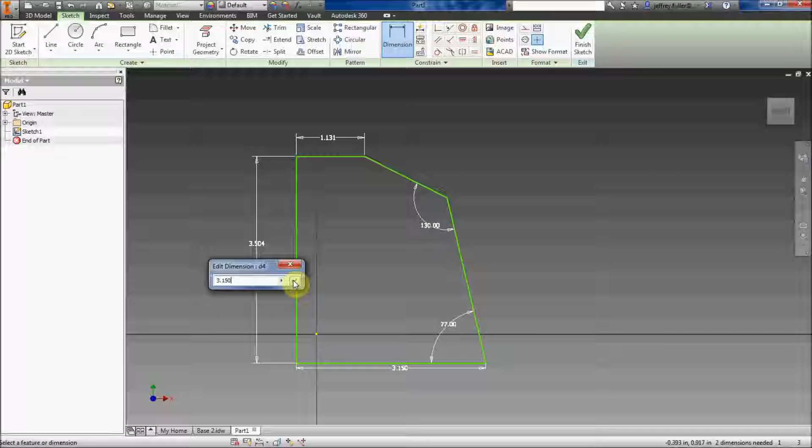Okay, everything else is still the same. Still got 77 degrees here, 130 degrees here, and we can double check this, 3.150 there.

Now I need to mirror what I've just created, and I'm going to use this command right here, called the mirror command. I'm going to click on it, and what it's asking me to do is select the geometry that I want to mirror. So I'll select this line, this line, this line, and this line. I'm not going to select this line, because that's going to be my mirror line.

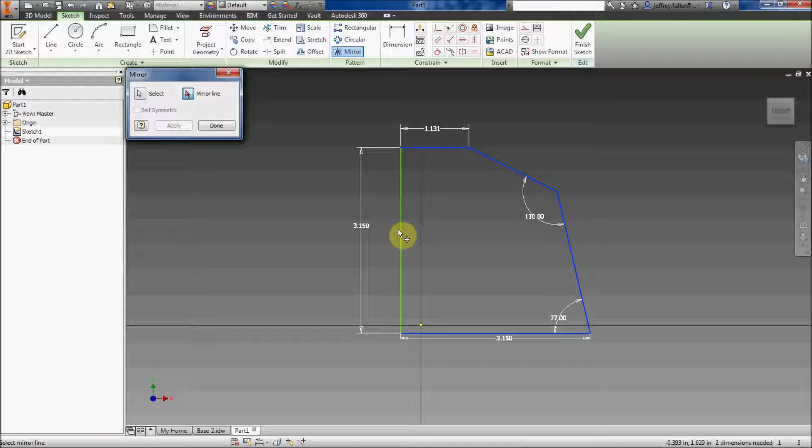So I go back to my dialog box here and click on the mirror line selection, and select that center line. Then I click apply, and now as you see I have my whole sketch of my entire base. Click done, and then of course we can click finish sketch.

Now we're going to extrude. I'm going to go back to my drawing and see how far I need to extrude it. So we're looking at this from the side. We'll go over here to this view, and we see that it is 4.724 inches wide. So 4.724 is how far I want to extrude it.

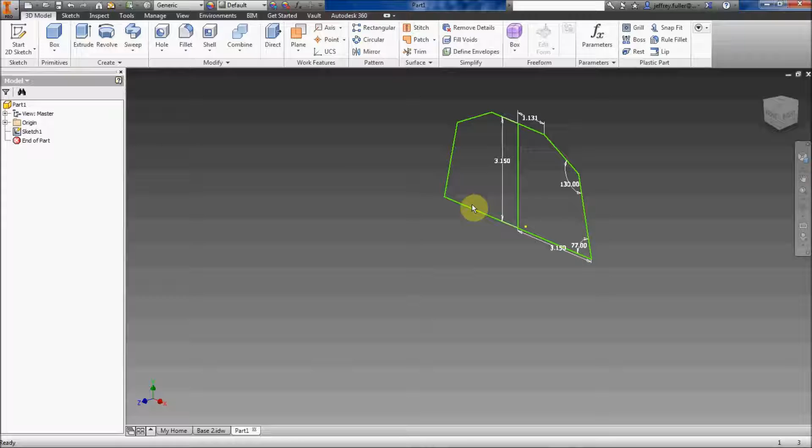Select both pieces of the geometry there, and 4.724. And there we go. There's the block of the base.

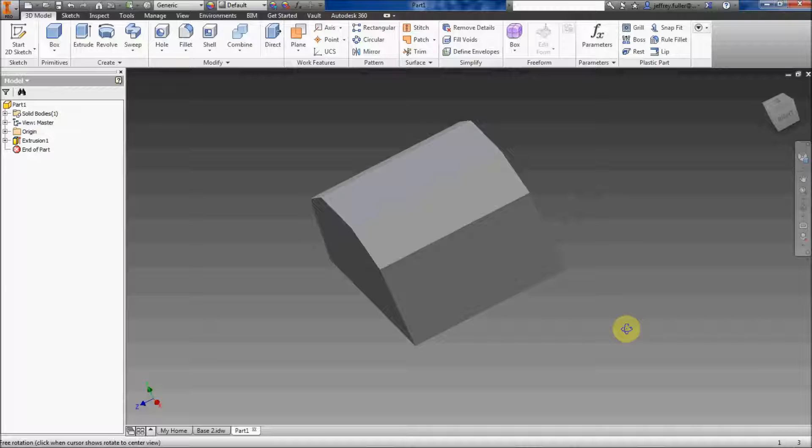Anyway, now of course there are some other features, like some fillets and things like that, but we're going to wait till the very last before we do our fillets. We don't want those fillets to interfere with the other geometries that we have to create going in here.

So next thing we need to do is put those two little loops that hold the lamp's arm up. It's actually going to have two arms, one arm on each side.

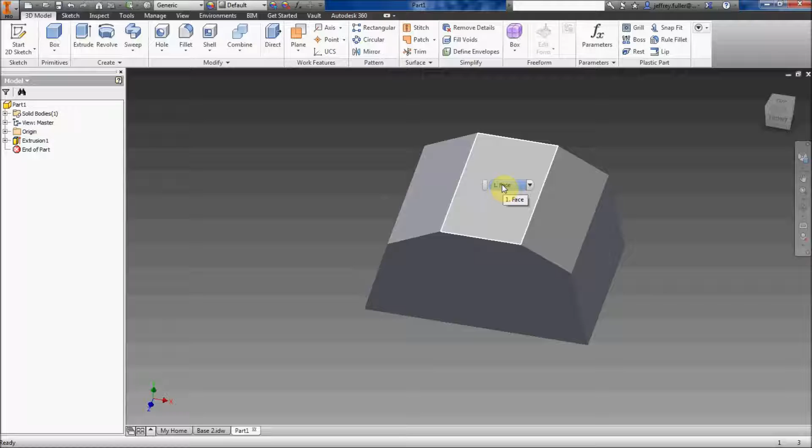So first thing I want to do is start a sketch up here and click on the face, and I'm also going to rotate it around so I'm looking at it in the same direction that my drawing is here.

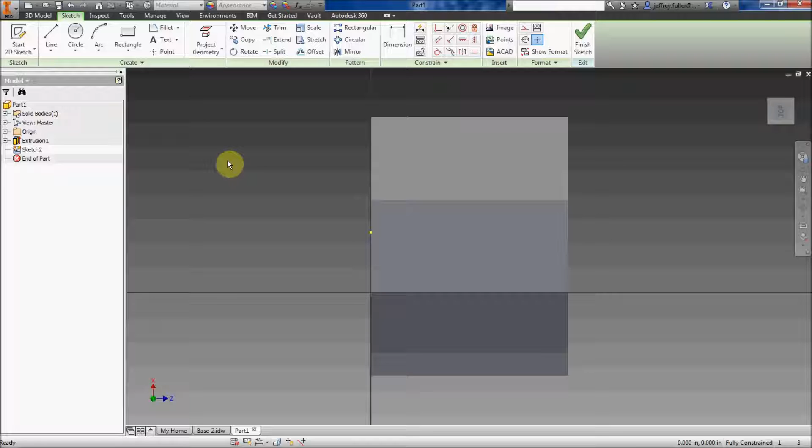And what I'm going to do here is kind of tricky, but I'm going to project geometry. Right now I'm working on this plane right here, the plane of the lamp base, but I need lines that are below that plane to dimension to.

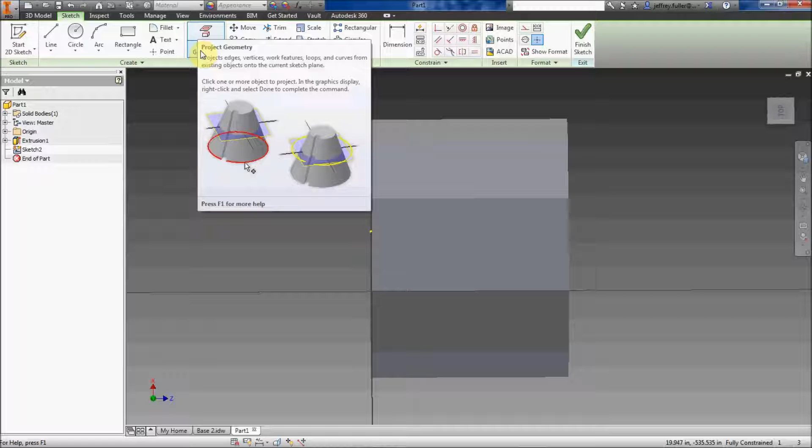So what I'm going to do is project geometry, and I can click here and tell it to project cut edges. Okay, and I got that edge. Okay, maybe I just need... there we go. I change it to just plain old project geometry, and I got that edge.

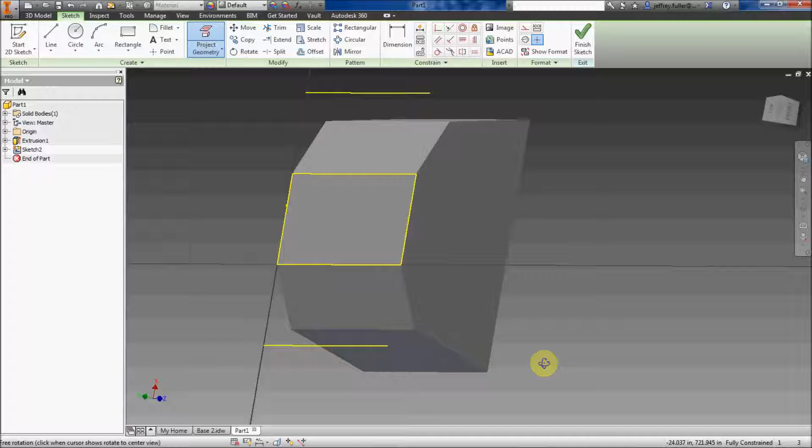You see there, that geometry is kind of suspended in midair. I'm going to use that to measure off of and to make sure everything is set to the right dimensions.

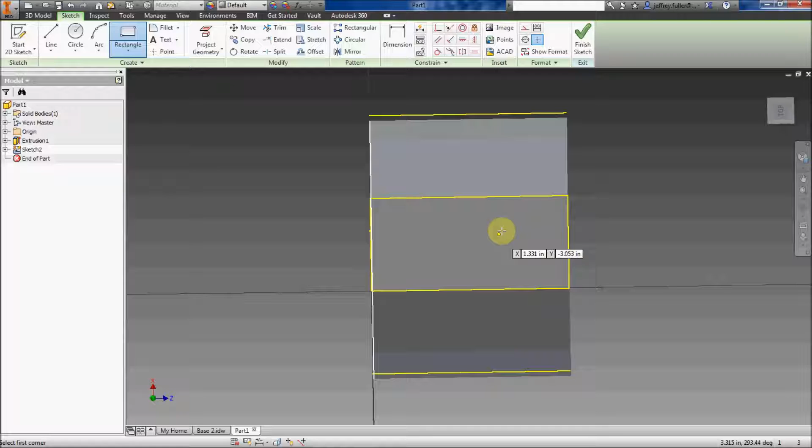So I want to create those two little plug-looking things there. They're going to hold the lamp arm, and I'm going to start with a rectangle. Click on the rectangle, and I'm just loosely going to draw it right here, and then I'm going to start dimensioning it. Alright, so there's my rectangle.

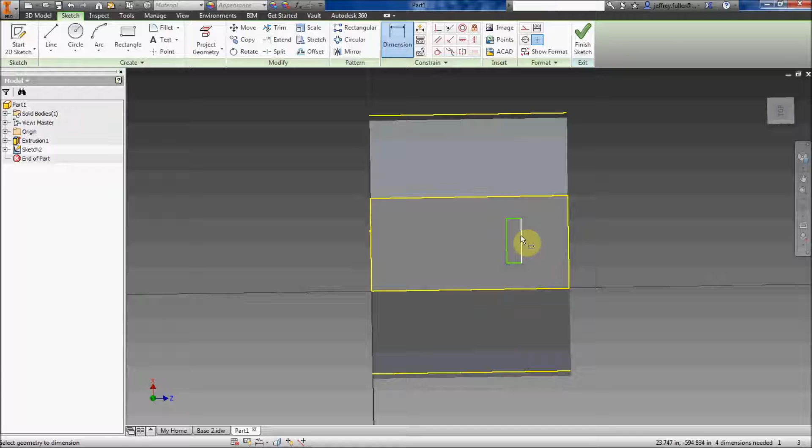I'm going to go back to my drawing, and I see here that it is 1.181 inches from the side of the extension piece to the side of the base itself. So I'll set that first. Dimension, click here and click here, and it is 1.181.

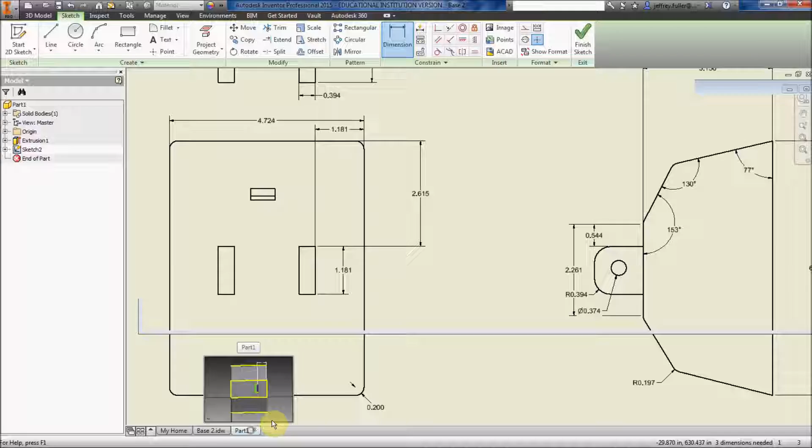Next, I'm going to get this dimension here that shows how far inset this edge of this piece is from this edge, and it is 2.615. So I'm going to click here, 2.615, I believe I said. I'm going to double check that.

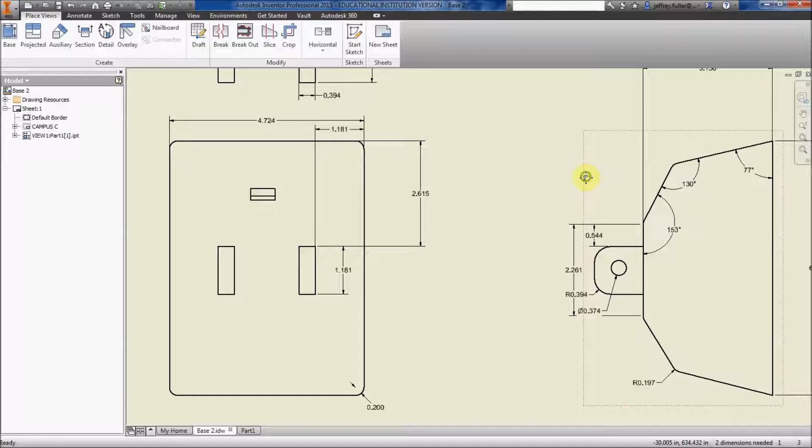Yeah, 2.615. Now, of course, the width of the piece here, if I go up here to my top drawing, is 0.394, so it's 0.394 inches wide. Let's see, 0.394.

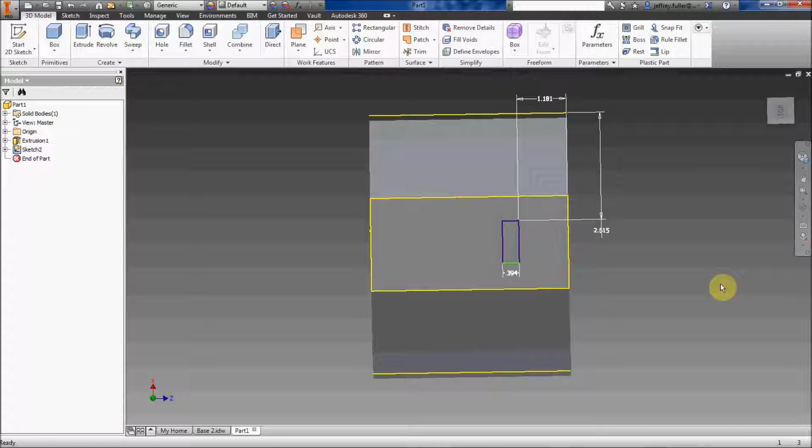So that is in place. We've got all the different dimensions that will put it in the right place. I'm going to finish sketch, and I'm going to extrude that.

I'm going to click on the extrude, click on the geometry that I want to extrude, and now I need a distance that I want to extrude it. So I'll go back here, and it is also from the base all the way up to the tip top there, 1.181.

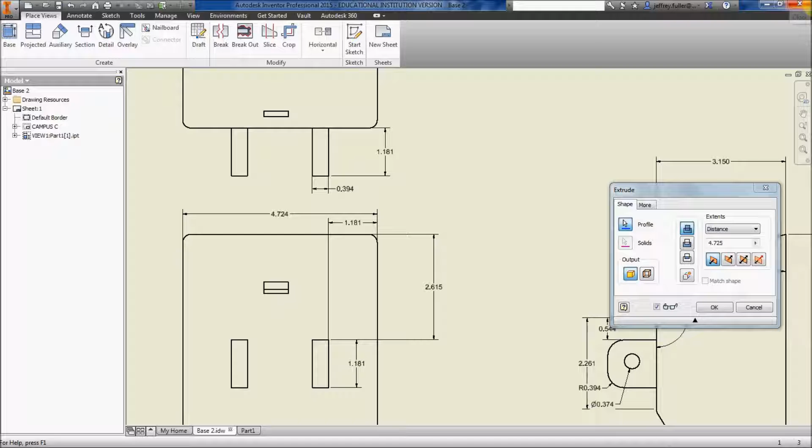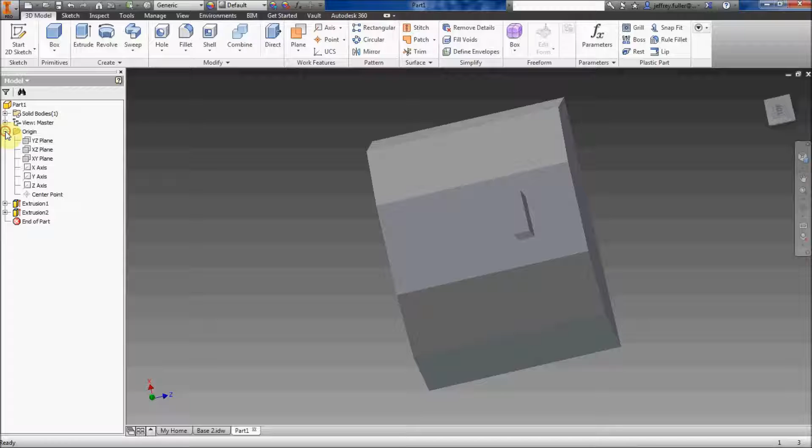Okay, so there it is. There's that feature. Of course, there's only one of them, and we know we have to have two. So what I'm going to do is mirror that too. To mirror it, I need to place a mirroring plane right in between, in the middle of the product itself, starting with the origin folder. I'll click it open, and no, that's not the plane I want. I want this plane right here, the XY plane. I'm going to right click on it, go down here, and turn it on by clicking visibility. Then I'll click the plane command and choose offset from plane.

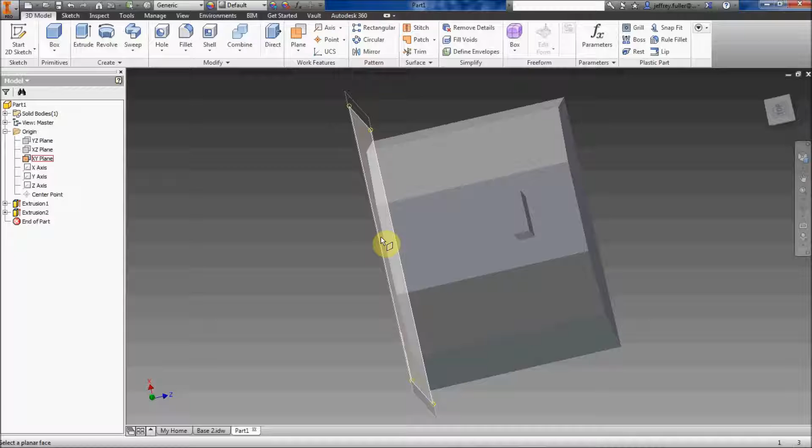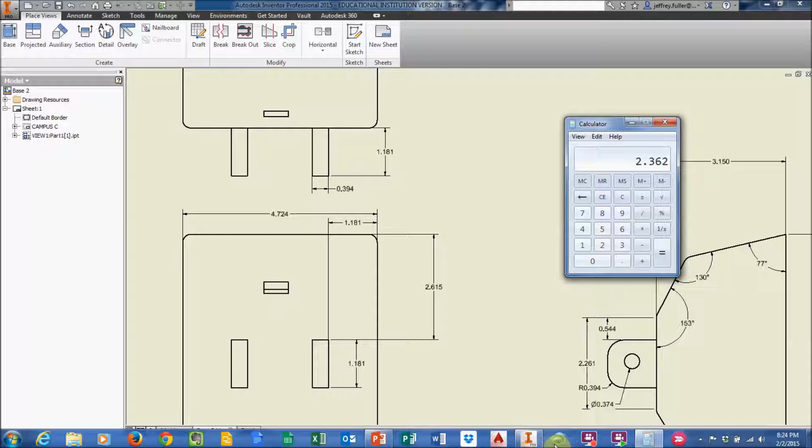Once I click on it, it shows me my arrow. I can pull my arrow to the center, but I want to make sure it's dead center. So I'll go back to my drawing and split this dimension, because this is what we're looking at, and we want the plane to go right down through the middle. So 4.724, half of that, 4.724 divided by 2 equals 2.362. I'm going to set this at 2.362, and that puts it dead center. Accept it.

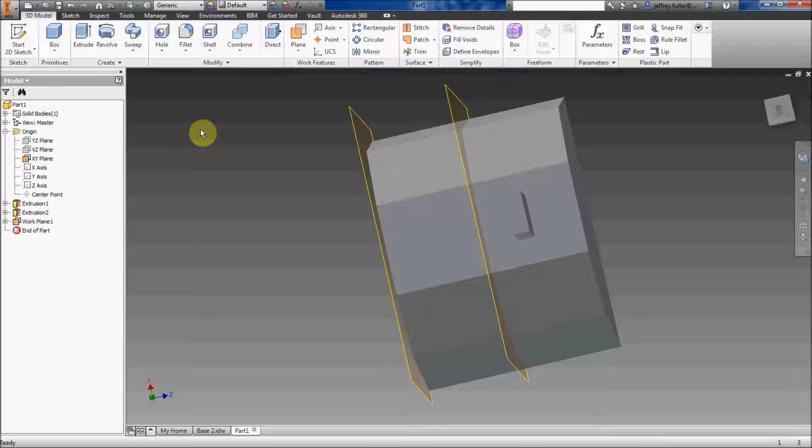Again, going back to the mirror command, the feature is this right here. That's what I want to copy. Then of course the mirror plane, I go here and select mirror plane and choose that plane right there. I click OK, and there's our feature again.

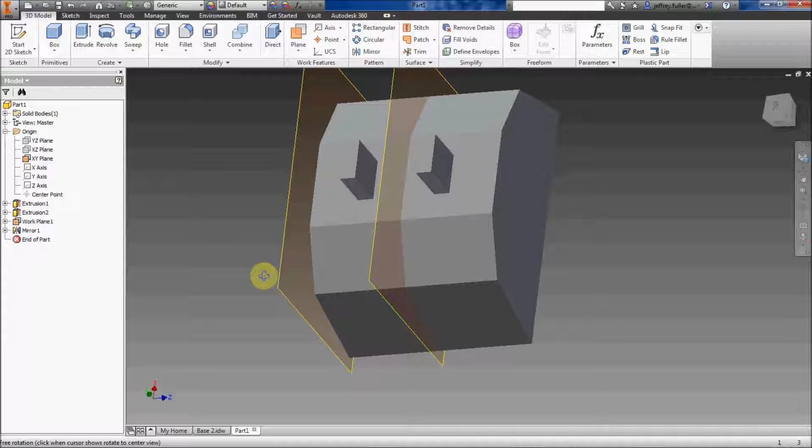Now to make the next phase of my work simple, I'm going to turn off the visibility of both of those planes. I turn off the XY plane, and I turn off this work plane that I created. And there we go. Now I can place the fillets and things all around to make this part look a bit smoother.

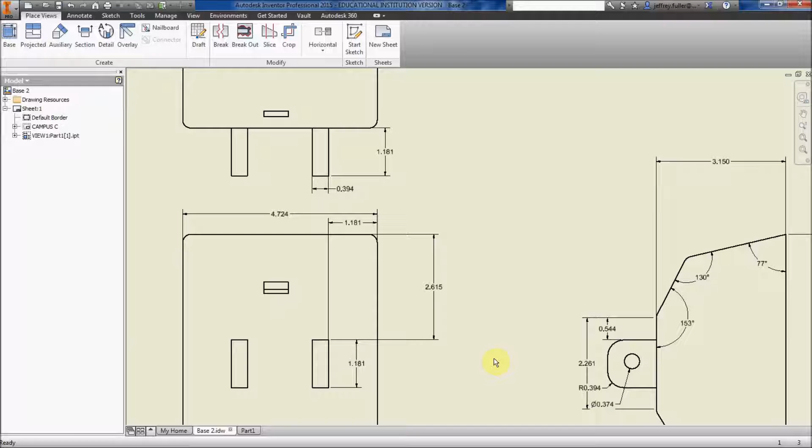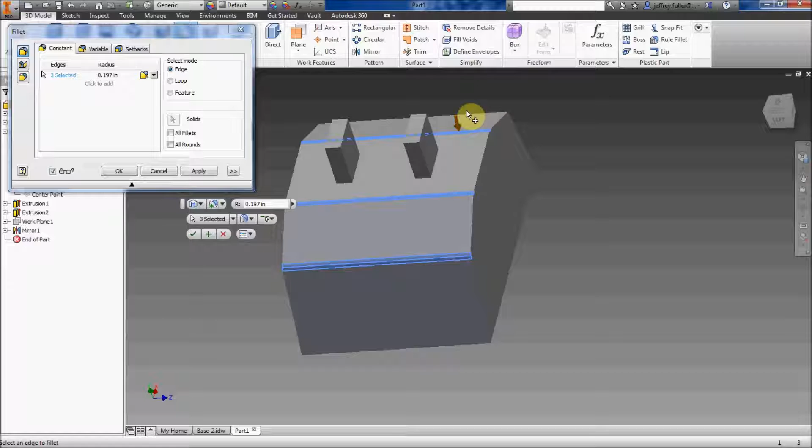And we have some measurements regarding that. We see here that our fillets on these edges that provide the contour of the product are 0.197. So I'm going to go back to my part here, click fillet, and enter 0.197. I'm going to click on those edges and click OK to smooth them out.

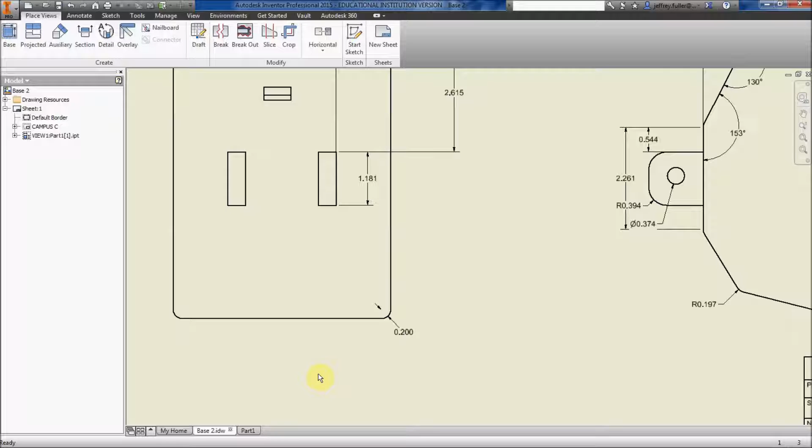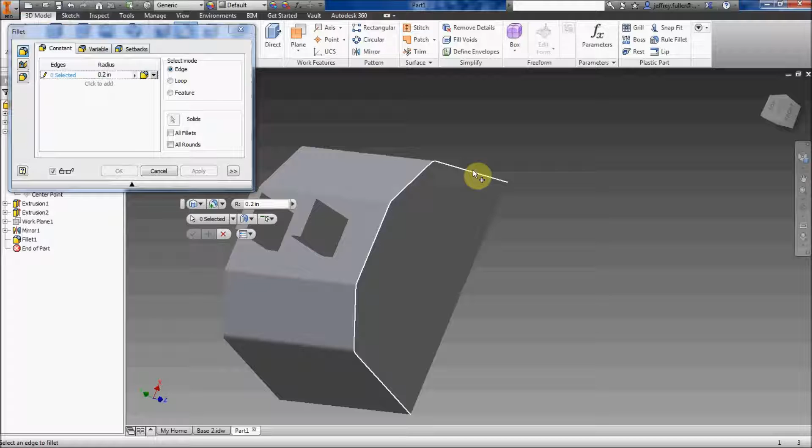The next thing I want to do is fillet around the product itself, taking all the sharp corners off of it. That one I'll find on this drawing looking down onto the base, and that is a 0.2 inch radius. So, fillet—I always want to say fillet, but it's really fillet—0.2. Then I'm going to go around and select all. If you're lucky, like this right here—normally it doesn't always do this—it just highlighted the entire contour. Click that. Go over here, do the same thing, click that. So the entire contour is now filleted. Click the green arrow check mark. Everything looks nice and smooth.

Now I also want to put a fillet on these two edges on the top of those two extensions we just created, and that is a radius of 0.394. So again, fillet, 0.394. Select the edges.

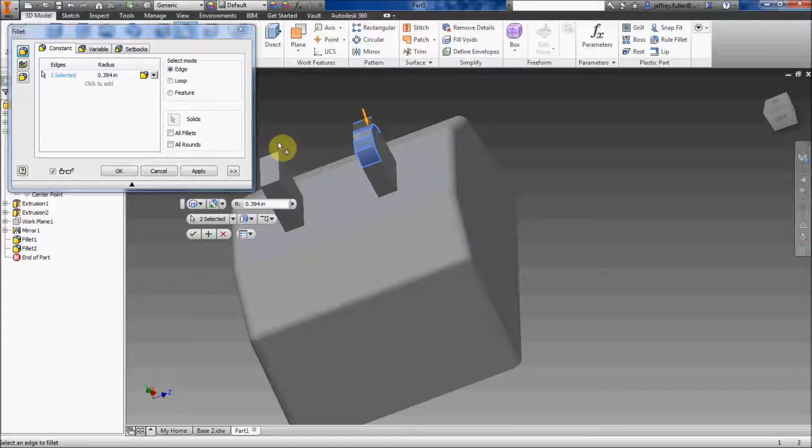Now I want to put a hole through the middle. This hole doesn't seem to be centered, so I'm not really going to use that as far as putting it that far forward—I'm going to actually center it when I put it on my base. The diameter of that circle is 0.394.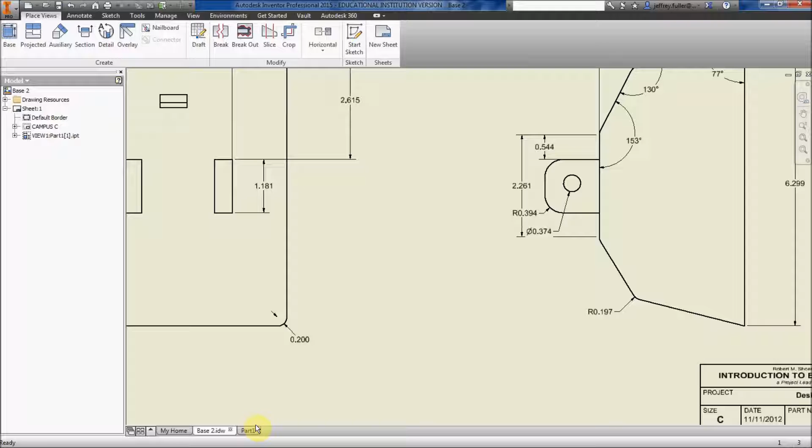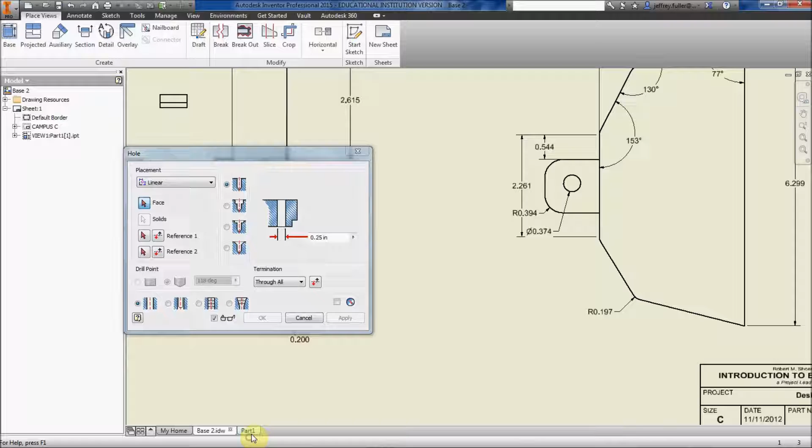So I'm going to place the circle as a hole using the hole command, placing it using linear references—I'll show you what I mean by references here. The size of the hole again was 0.374, so I'm going to set this at 0.374, and place the hole right here. I'll just pick a spot and place it.

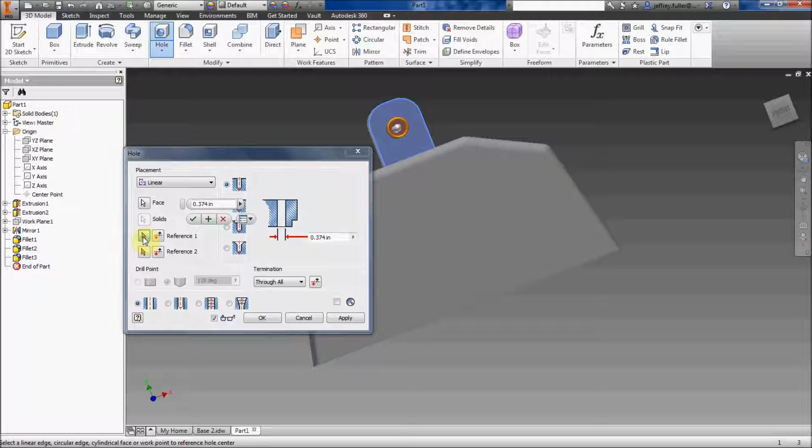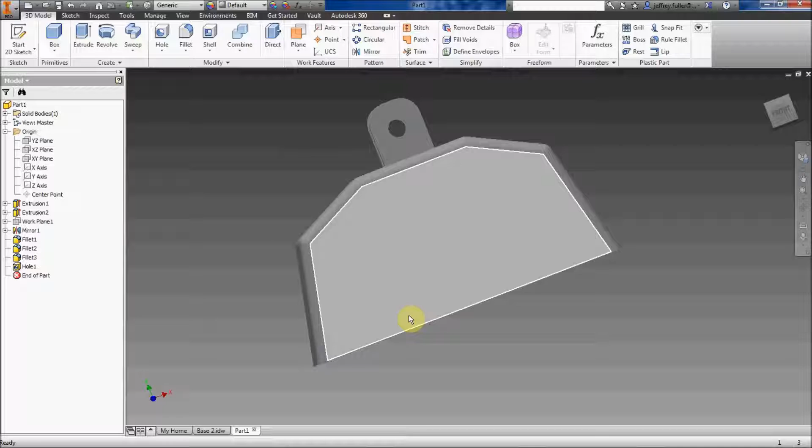Now that I'm setting the placement linearly, it goes from the face. It highlights reference number 1, so my first reference is going to be the top, then it goes to reference number 2—my second reference is this line here. That centers the hole up on that piece of geometry. Then I click OK, and there we go. We got a hole all the way through both sides. So that is the base. The base is done.